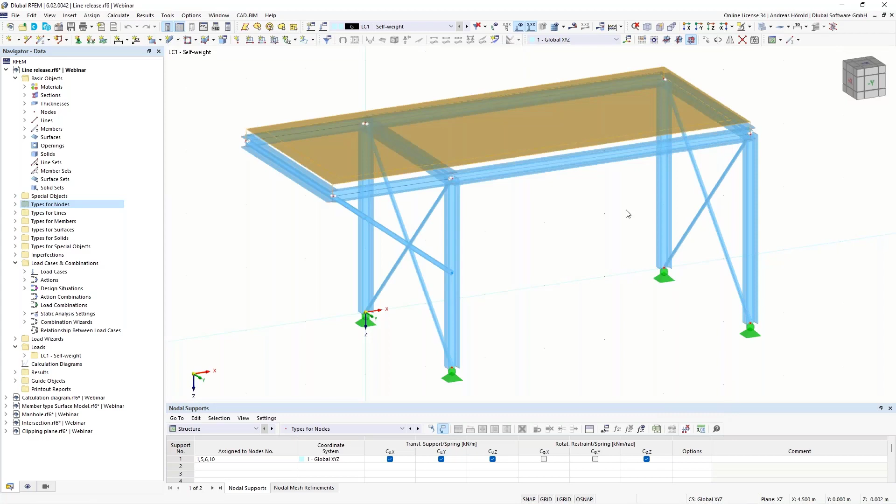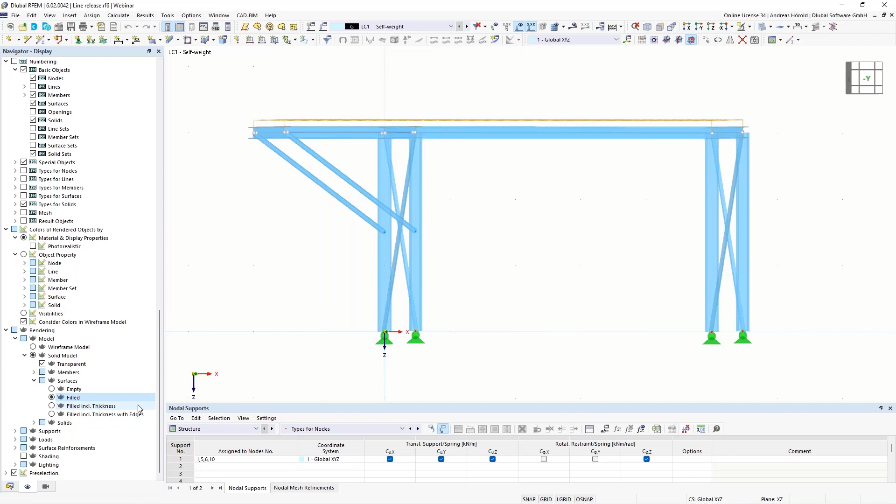This is member number 18. To see it better, I go to the navigator display, then solid model, surface is now filled, and this is filled including thickness. I would like to display it without the thickness.

So the target is that when I assign a load in that field here, this area of the slab can take off. This isn't the case at the moment.

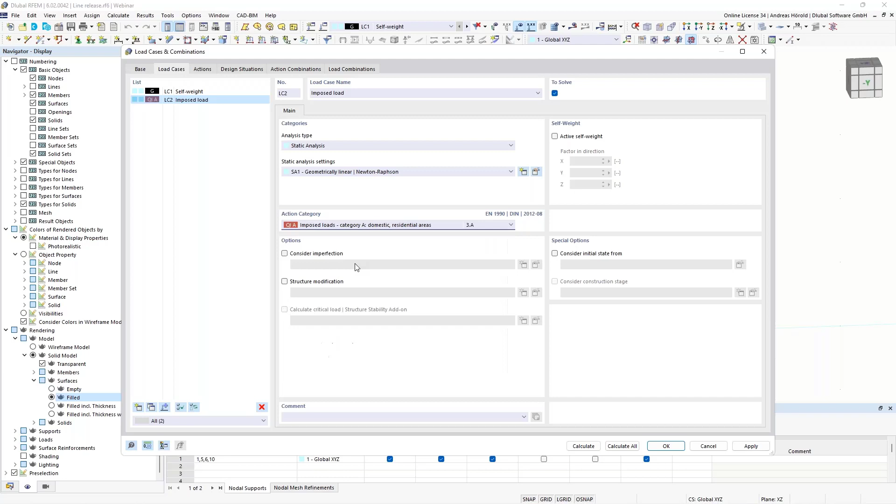Let's try that. I create a new load case imposed loads, with the action category imposed loads. Since it is a full slab here over two fields, I have to define a rectangular load, left above, insert loads, and then free rectangular loads - that's the feature I use.

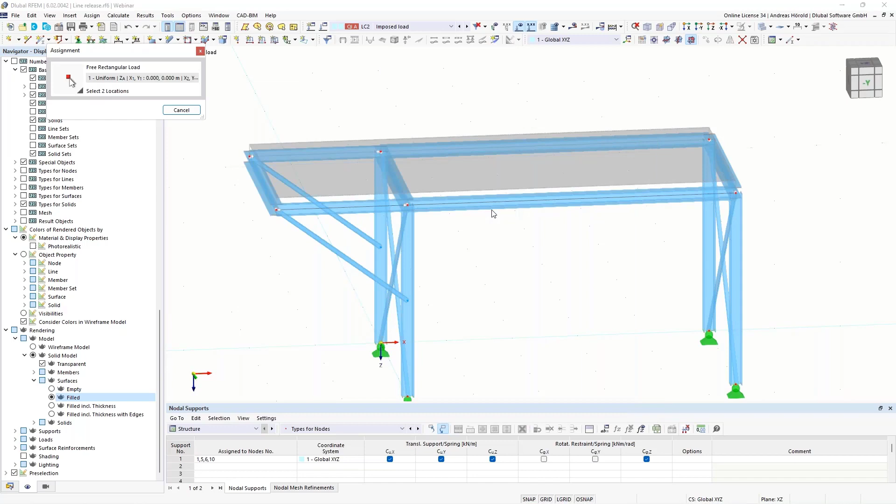So I select the slab. Then a quite high load, 20 kilonewton per square meter, and I define the edges. Okay, that's all.

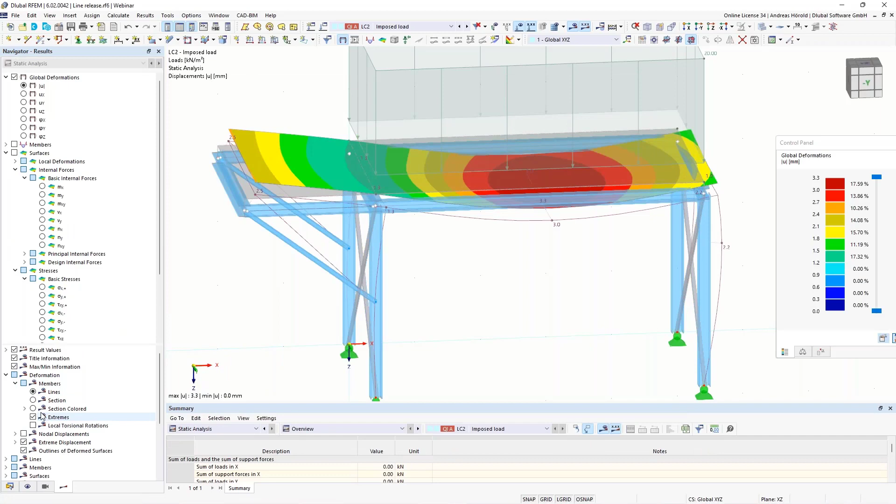So, and I calculate the load case. And you will see that the concrete slab can't take off. I displayed the sections colored, so you can see that the slab doesn't take off here in this area.

How to do that? With a line release. So, insert, special objects, and you can find the nodal releases, line releases, and surface releases here. They act the same way, and I use it in this example.

I use in this example the line releases, since they work simultaneously or similarly. I select the lines, all the lines into place, and I release surface number 1. This one - it's only one surface.

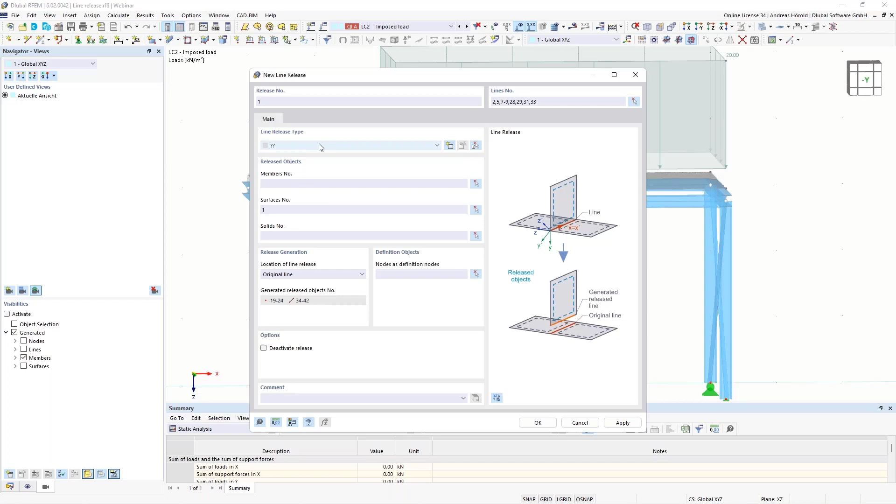And I have to define the line release type. In the first step, I release the Z-direction, and I use this nonlinearity: fixed if positive V-Z. That means if the load is in the plus Z direction, it is fixed, but it can take off if the load is in the minus Z direction.

Okay, let's try that. We calculate the load case again.

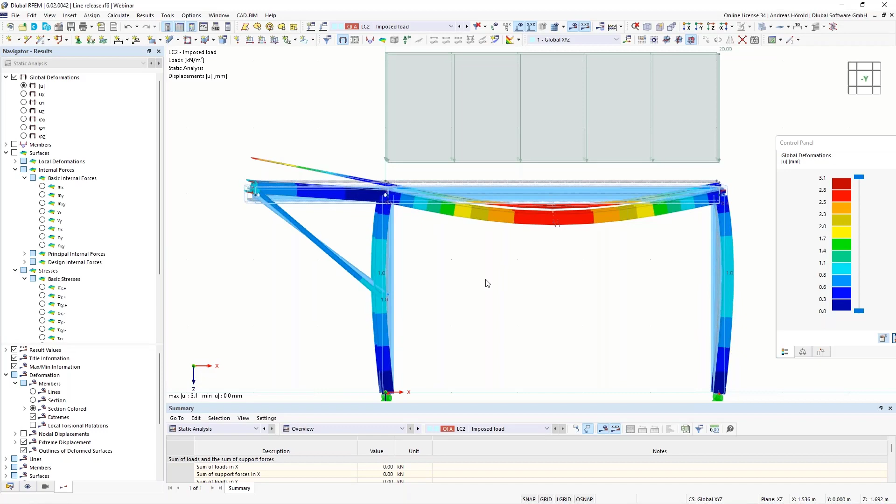So now you can see that the concrete slab takes off. But in that area, the beams act as composite beams because of the eccentricity of the concrete slab. At the moment, we have a deformation of 3.1 millimeters.

And when I release the slab in direction X and Y, then we will get a higher deformation. Then the concrete slab lies loosely at the top of the steel structure.

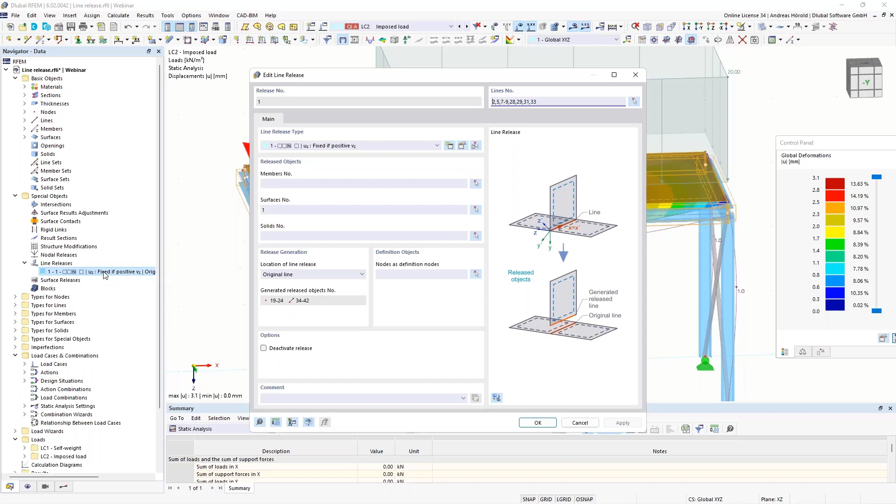So in the navigator data, under special objects, you find the line releases, and you can double click on it, or you can search for the types for special objects, and double click on the line release type, and then the same dialog opens.

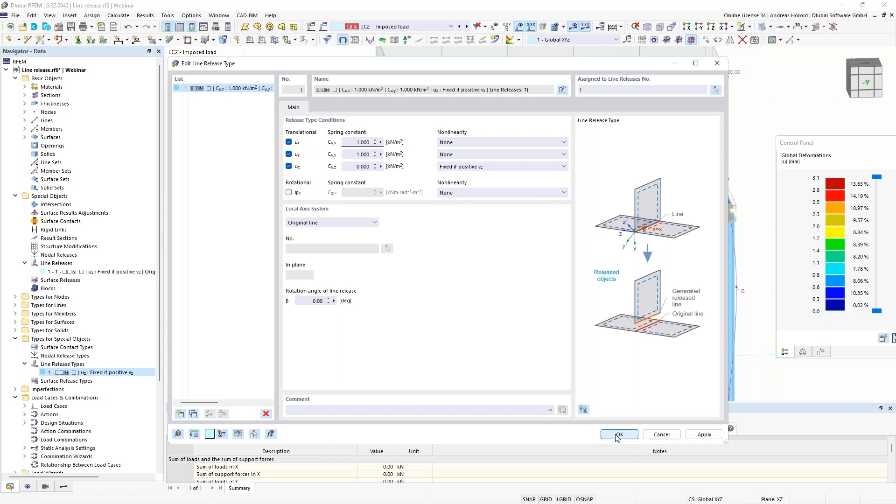Okay, then I release the concrete slab in Y and X direction, but I have to enter a small spring so that the slab can't be moved, otherwise it would be unstable when it would be 0.

Okay, we had a deformation of 3.1 millimeters. Now they aren't composite beams anymore, and that's why we get a higher deformation of 5 millimeters.

Okay, then we turn back to the PowerPoint slide. Next feature, result difference to initial state. That is useful.

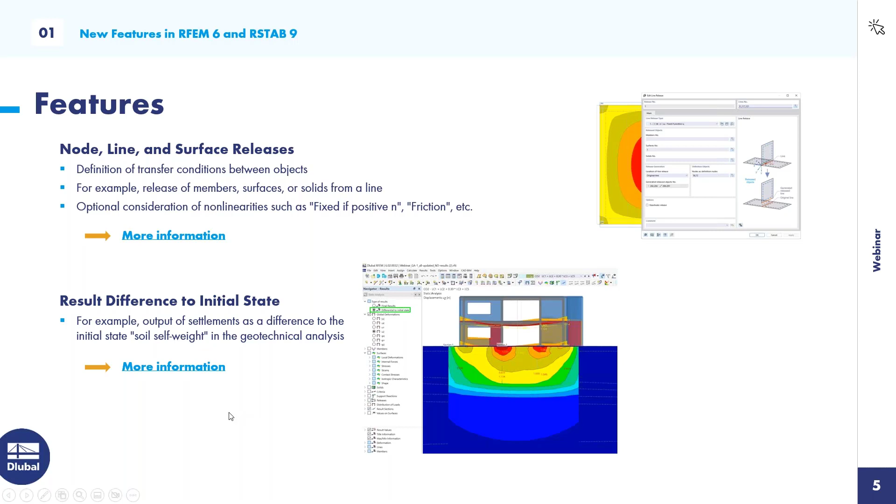Also this feature is useful, for example, if you would like to consider the soil self weight as an initial state in the geotechnical analysis. We showed that feature in the latest webinar about geotechnical analysis. You can find it on our website.

So, next features, small, but I think good features: the zoom with window with the right mouse button, or the animation of deformations. I showed it in the program.

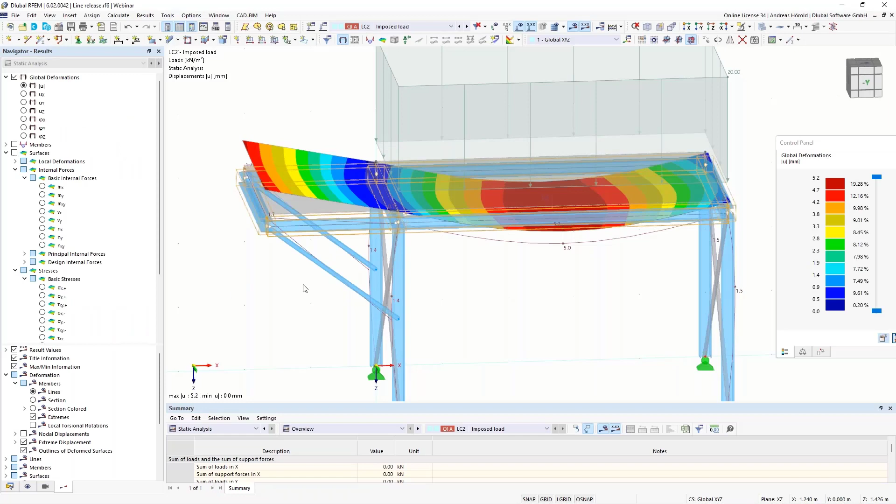So if you click with the right mouse, then you can zoom in here. I don't use this feature because I have a scroll wheel, and I can zoom in and zoom out with the mouse wheel.

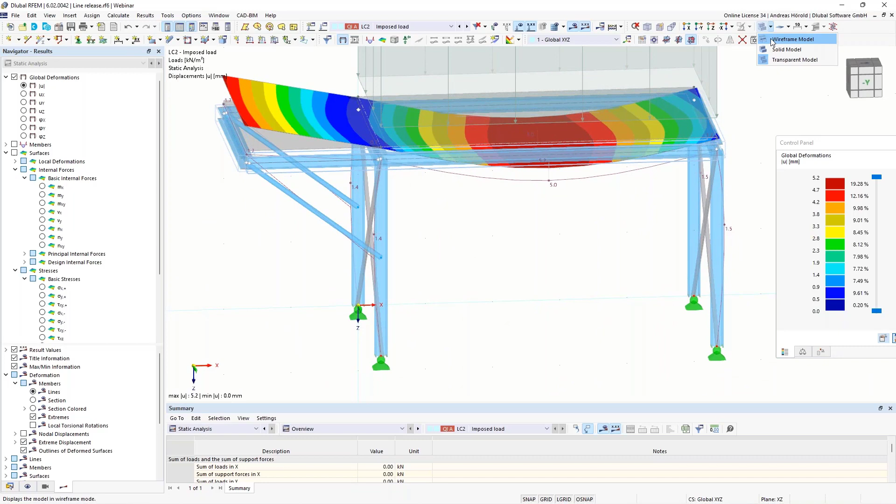I switch to the wireframe model. You can select objects by pressing, or more than one object with the control key. I hope you see the plus on the cursor. And with the shift key, you see a minus. I hope you can see it. And you can exclude it from the selection.

So double click on an object and you can edit the object, or right click to open the context menu. And if you select anything and press the control key, then you can copy those columns here, and without pressing the control key, you can move them via drag and drop.

Okay, that should be all for the mouse functions. Here under the load cases, you can animate the deformations, also with colored sections.

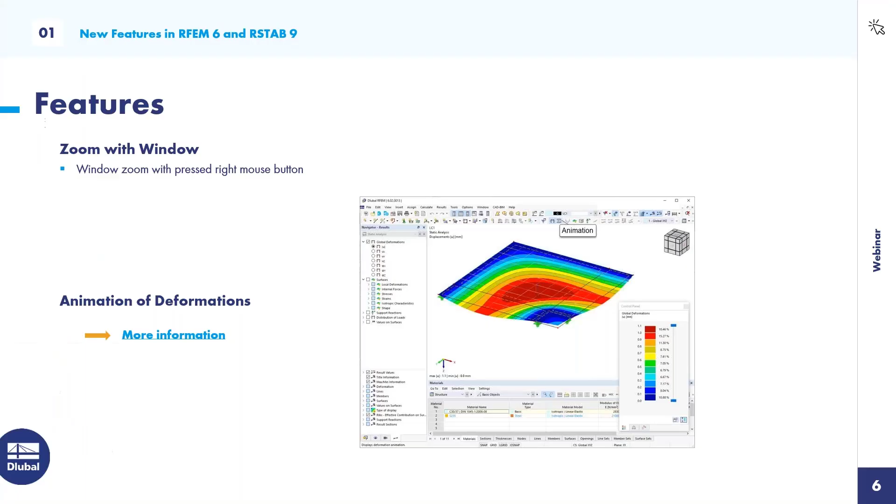Then we turn back to the PowerPoint slides. Next feature, save as version.

You can save different model states within a model. You can define an automatic save, and you can adjust the cycle. I showed it also in the program.

File, save as version. And when you open the base data, also left above, then you can find the register history, and you can find that saved version. I've already got some saved versions because of the German webinar. You can add comments, for example, a completed steel structure or completed model without loads, etc.

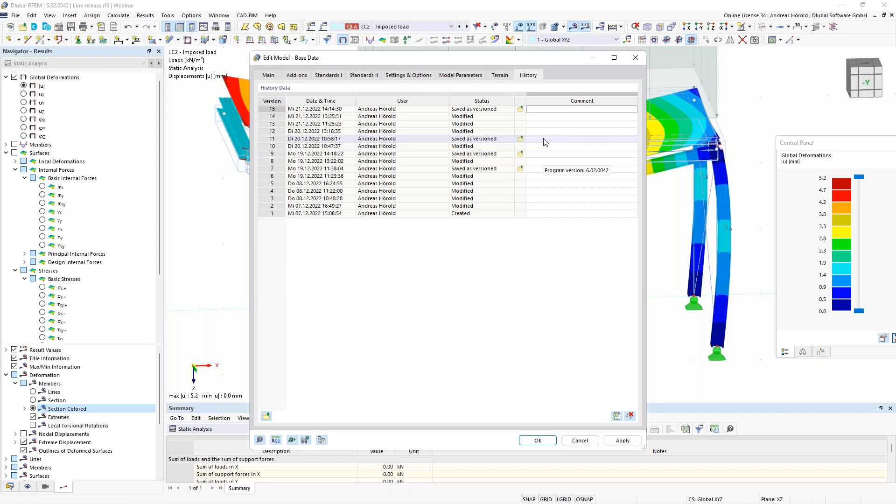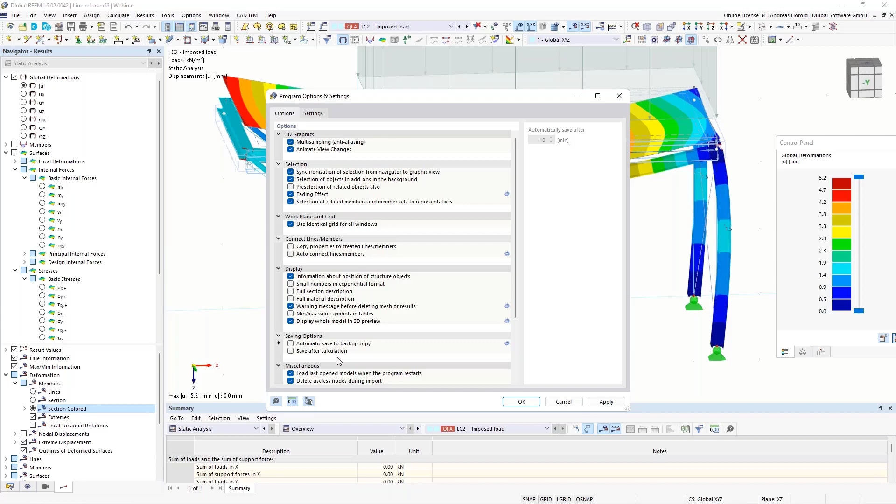Okay, and under options, program options, you can find the automatic save function, and you can adjust the cycle. It's also possible to save after every calculation.

Okay, then next features: displaying result values on ISO lines, for example for deformations, internal forces, stresses, and so on. I can show that also in the program.

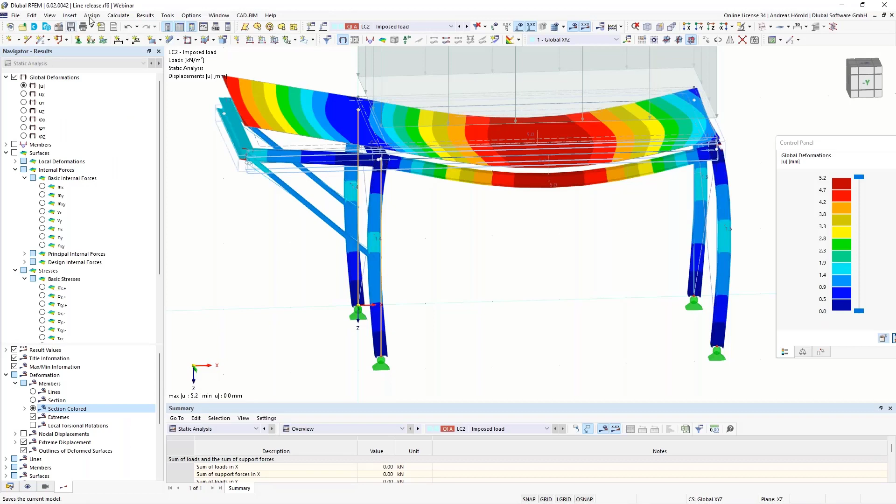We change the view, set direction.

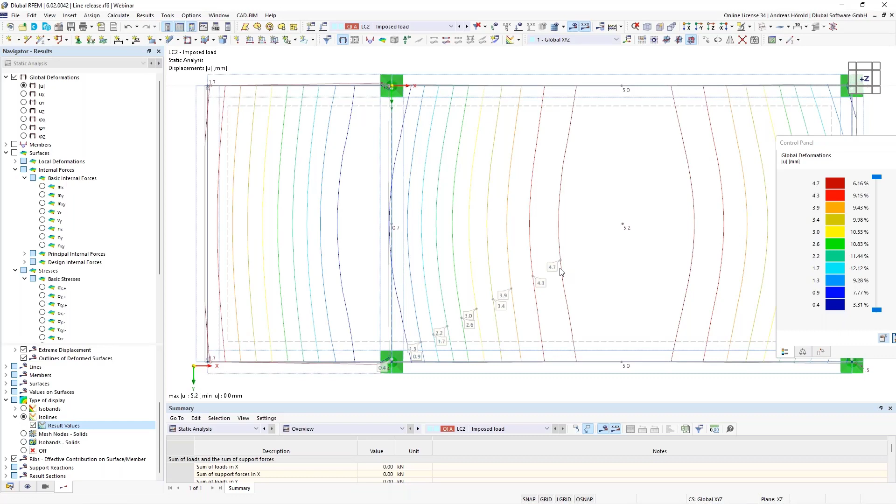And when I scroll down to the ISO lines and the result values, then you can see the ISO lines and the result values. It can be quite a good feature when you document pictures in the printout report. The same is valid for internal forces and so on.

Okay, also another feature, I change to the isometric view, is the perspective camera. It was wished by several users, and we implemented that. It was already there in RFEM 5.

Okay, then next feature is the 3D mouse support. You can operate with your free hand. I don't have a 3D mouse, that's why I can't show that, but I would like to mention that feature.

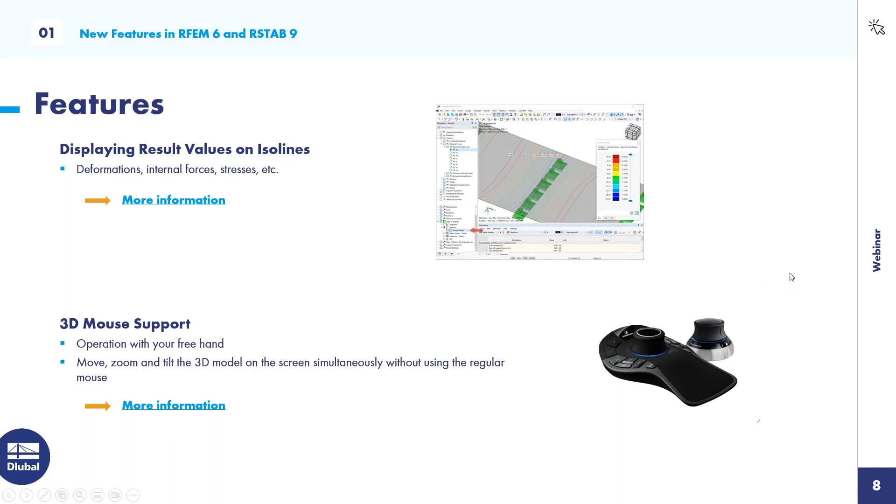And anytime you can find more information when you download the PowerPoint slide and then click on the link. At the end of the webinar, I'll show you where you can find the slides.

Then creation of calculation diagrams. You can represent relationships between different results, for example stress strains, internal forces, deformation, etc. I would like to show that with another model.

A simple column fixed at the bottom, and on the left side in the navigator data, where are the calculation diagrams. I already created two diagrams. For example, for the static analysis, the increment, maximum deformation, and you can see such a diagram. It's non-linear because I use the large deformation method.

So that's for the static analysis, and this diagram is for the stability analysis. I create another diagram where you can see the options on the horizontal axis. There are different types: members, global deformations, member strains, etc. I use nodes, global deformation, UX,

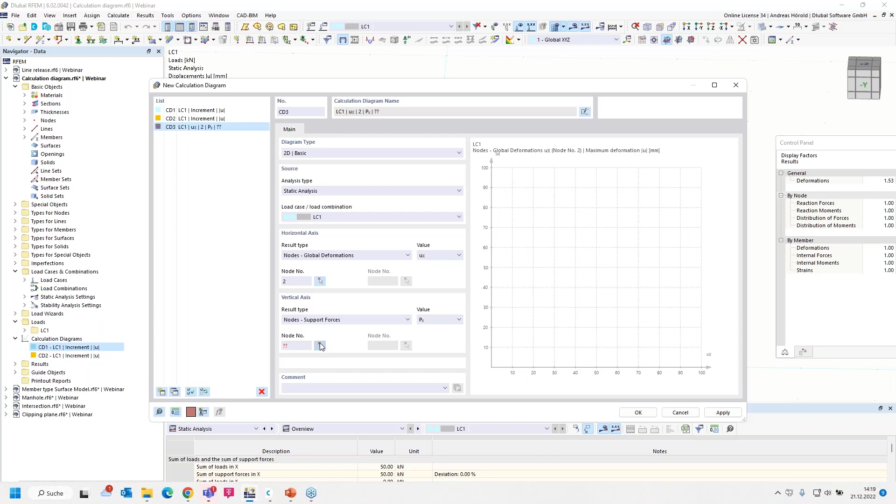and the node at the top. And I use here nodes support forces, PX, and the node at the bottom. And then you get such a diagram.

Okay, that was wished by a lot of users. Then turn back to the PowerPoint slides. Changing node types, yeah, you can adjust the type and location. I would like to show that also in the first model.

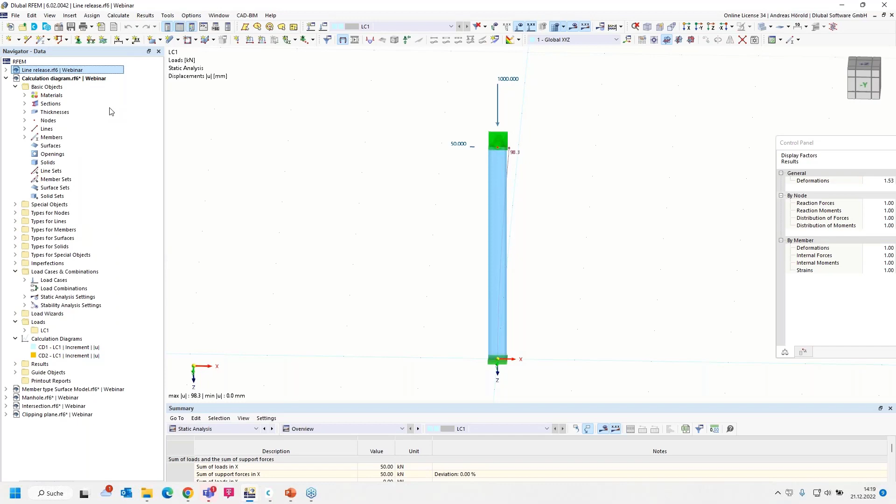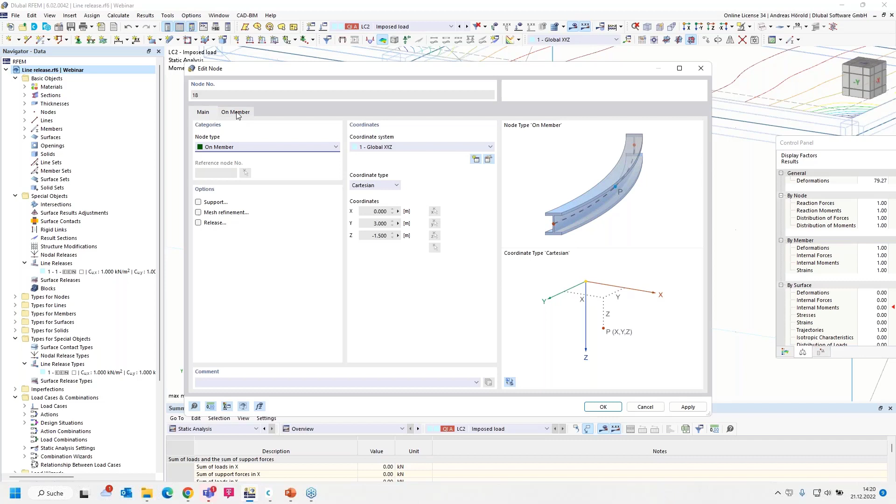Now, for example, for this node, when I double click on it, you can change the node type, for example, from on-member to standard. You can add supports, mesh refinement, releases, etc. And you can change the distance between the two nodes. For example, I can change that from 50 to 20% and apply that. Okay, and the node has been moved.

I undo that. Okay, then back to the PowerPoint slide. Next features.

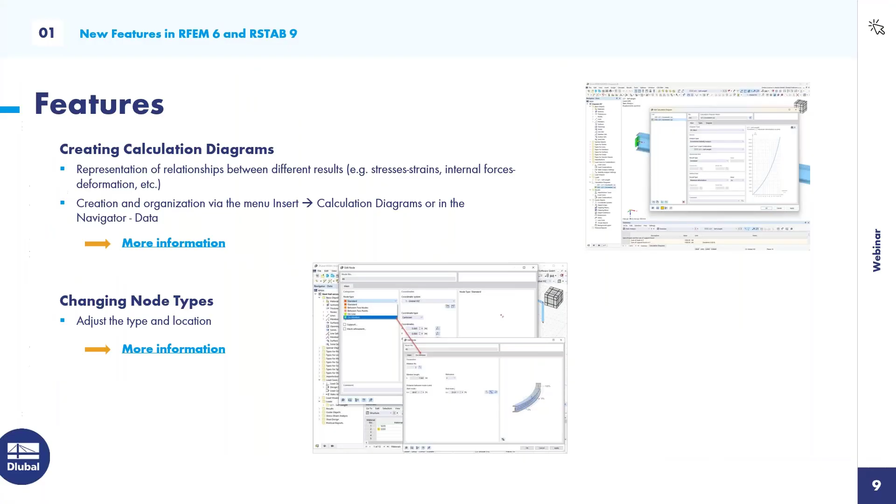A quite powerful feature, the member type surface model. You can simulate openings in webs. You can consider the real stress distribution. And you can use the member results in the add-on. You can use it for castellated beams, perforated beams, beams with rectangular openings, Vierendeel trusses, etc.

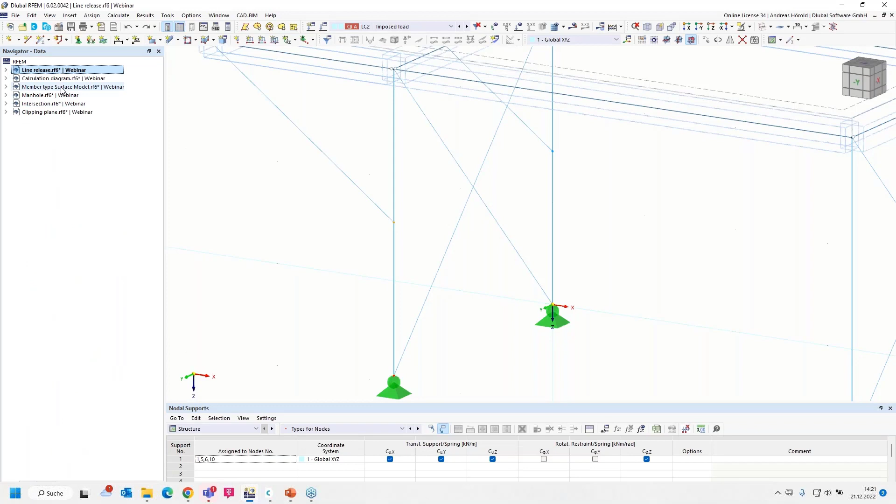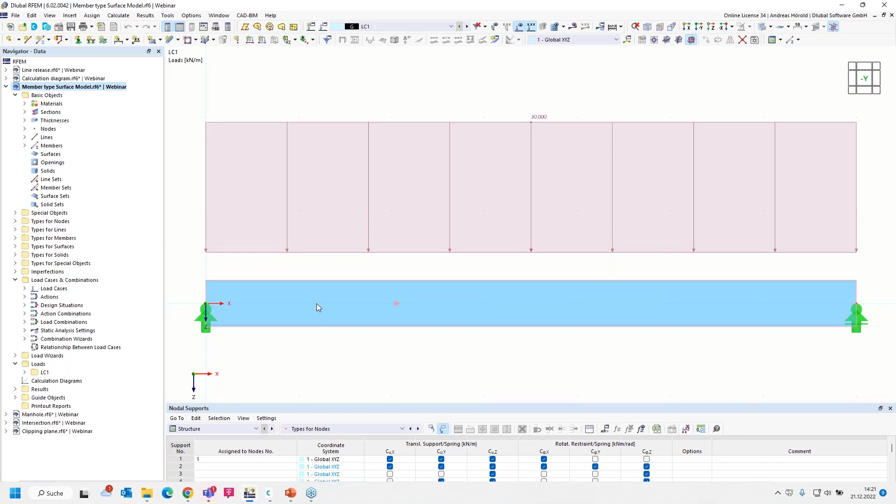I would like to show that in another example. I've already prepared a single span beam. The cross section is an IPE 500, and I would like to add holes, or openings, here. So that's why I double click on the member and change the member type to surface model.

And I select here member openings. A dialog was added, member openings, and I define the openings. There are three reduction types: rectangle opening, which you can see here in the preview, the circle opening, and the hexagonal opening. Such a typical castellated beam is displayed here in the preview.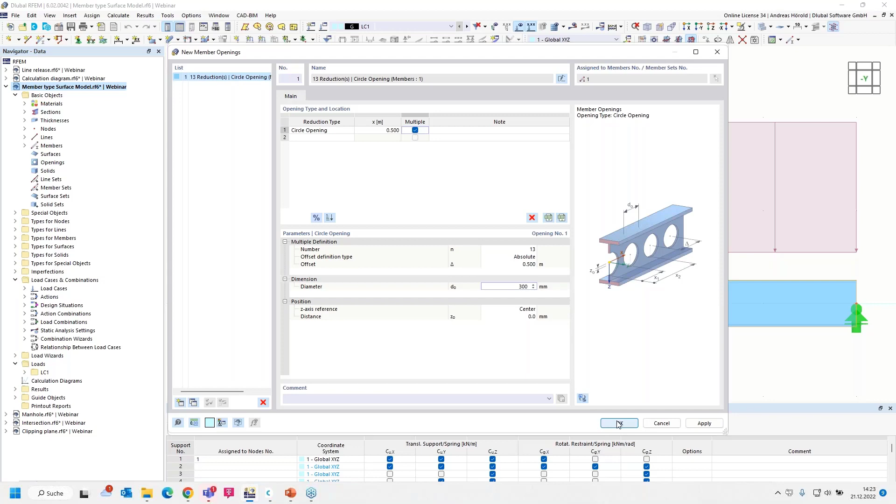I select the circle opening. I start at 0.5 meter, and I would like to add more than one opening: 13 openings, and the offset can be absolute or relative. If relative, you have to enter a percentage here. I choose absolute, and the offset should be 0.5 meter, and the diameter 300 millimeters. Okay, I apply that, and you can see the circle openings.

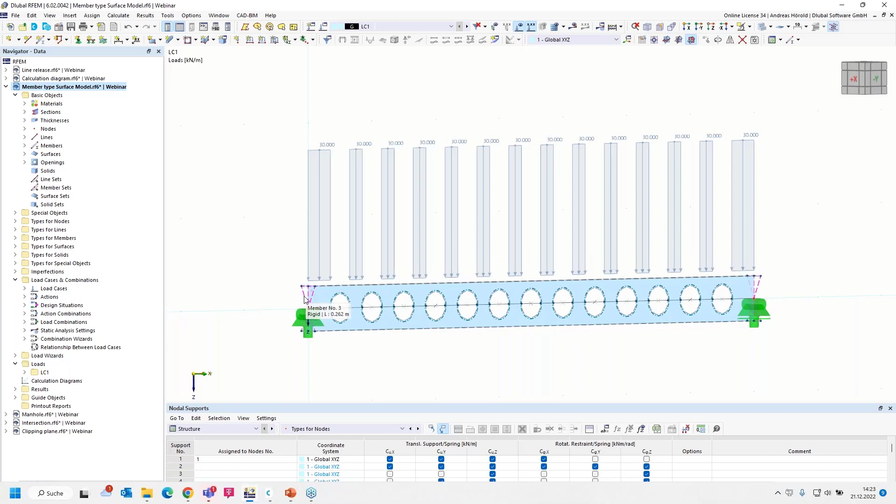Right above, there's a new button, and you can switch between displaying the surface model and the normal model. So you can see rigid members here that connect members, for example, if you want to consider such a model in your complete member model, the stiffness, for example, of such a member or something like that.

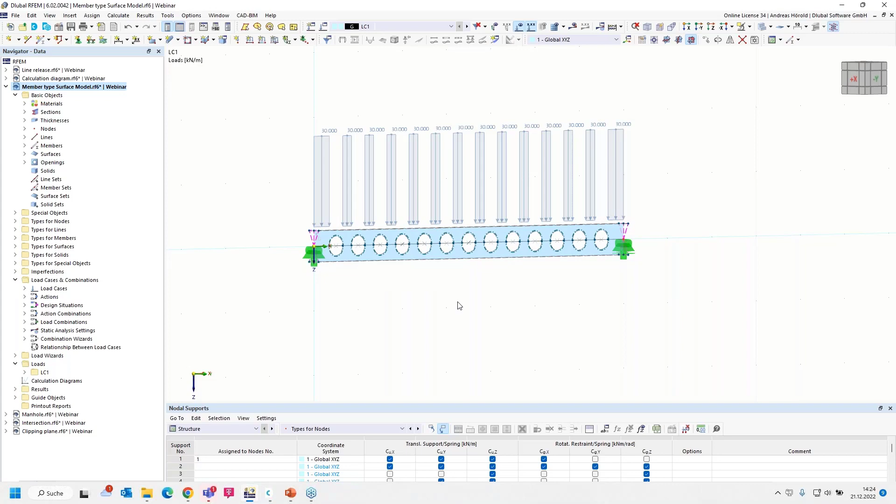So you can see that the load has gaps. I entered the load in the middle of the beam, and I would like to correct that there are gaps. In the navigator data, where are the loads? You can see the new line load and the member load, and both are still connected. If I change the member load, the line load will be changed.

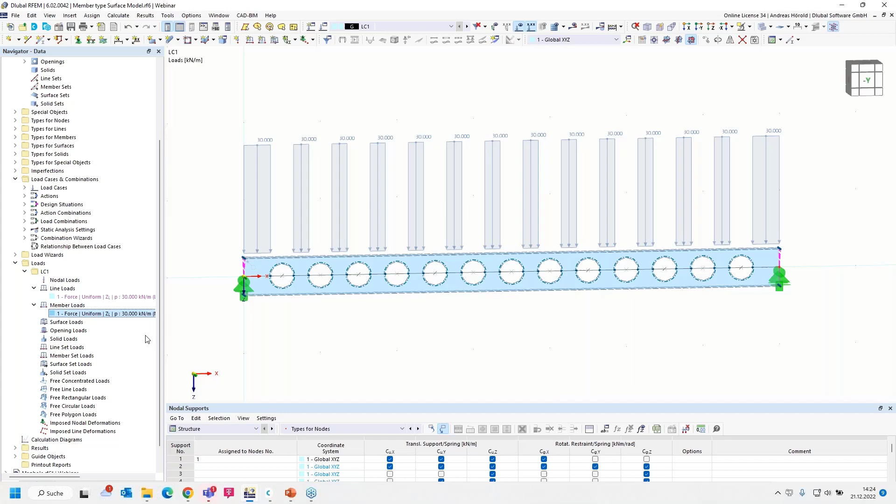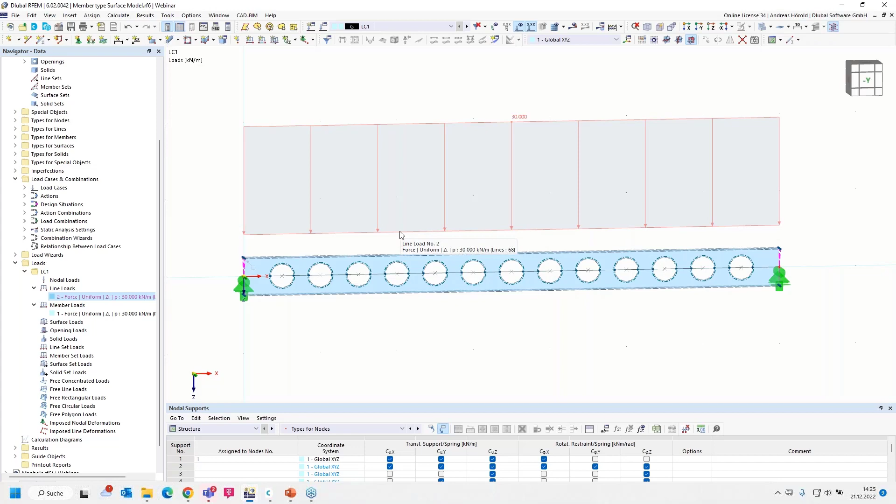So I double click on it, then I select eccentricity, and under force eccentricity, I select the top of the member for the load. Okay, and now you can see the member load and the line load, and the line load acts on line number 68. You can see that in the preview, and this line is line number 68.

Okay, that's correct now. So then we can calculate, or I have also defined a design situation, with only one load case, but I use that design situation.

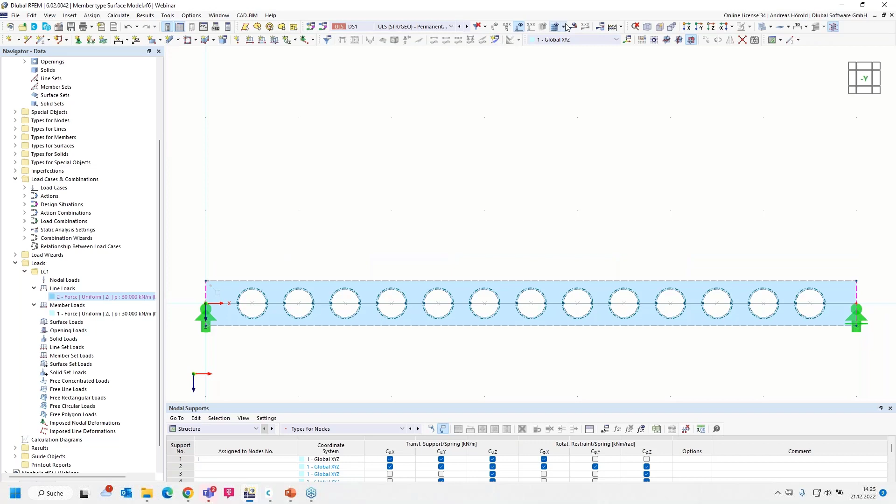So, and now you can see, for example, the surface stresses, basic stresses, principal stresses, and so on.

And if you want to do a real design, then you have to go to the base data and activate the add-on stress strain analysis. I change the settings of the stress strain analysis, and I select only the surfaces for the design.

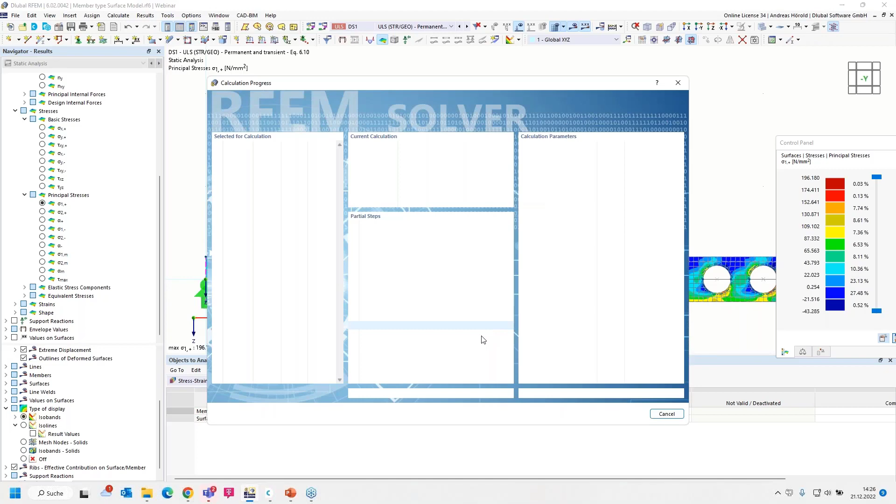And now you can see also a stress ratio, the different stresses, sigma eq v max von Mises, for example. Yeah, that's a normal stress analysis.

If you want to do a stability design, you have to activate the add-on structure stability, and with the eigenvalues, you have to define imperfections and assign that to the structure and do a stability analysis. But for such a stress analysis, we would be at the end.

Okay, that should be all to that feature.

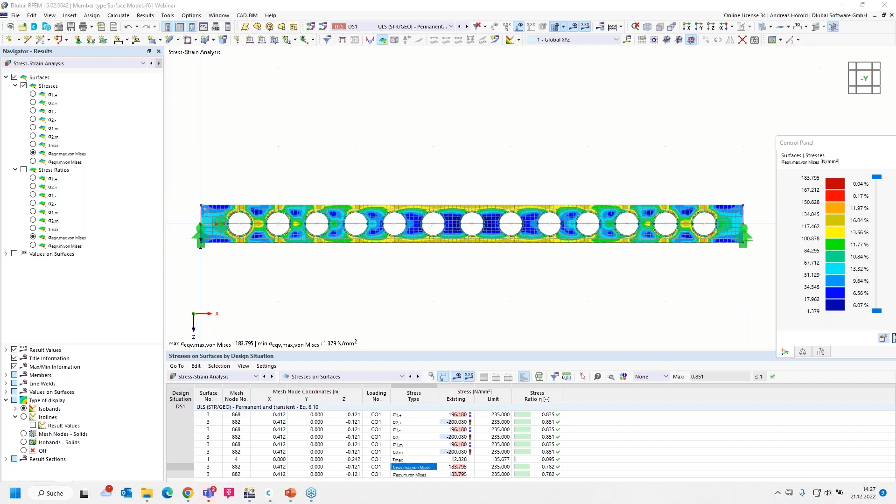Next feature is plastic hinges according to FEMA 356. And it's possible to create pushover curves with that feature. In the future, we will implement the new add-on pushover analysis. I will mention that in the prospects.

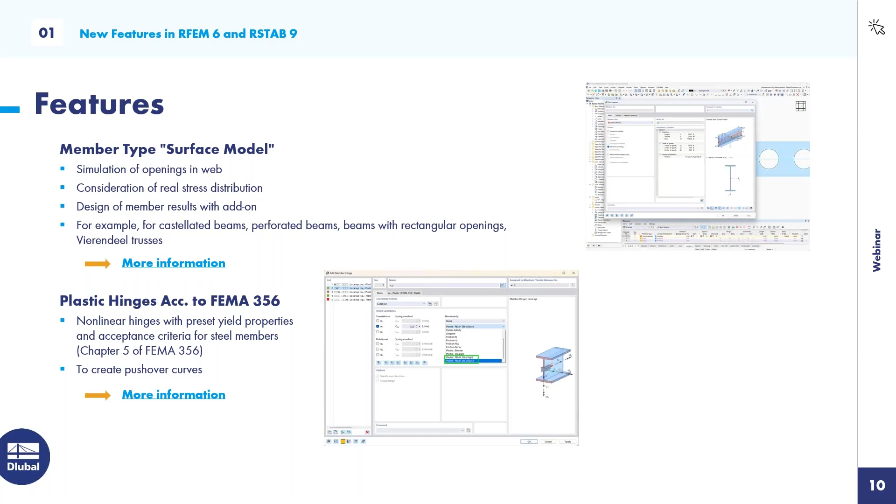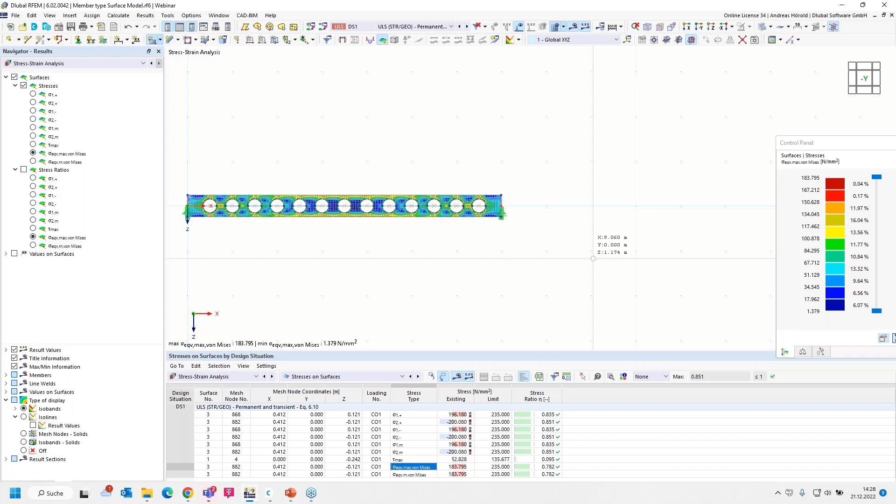Okay, next feature, dividing surfaces with intersection lines. That's quickly to show. I create this simple rectangular slab. Doesn't matter what it for materials. Then I draw a line.

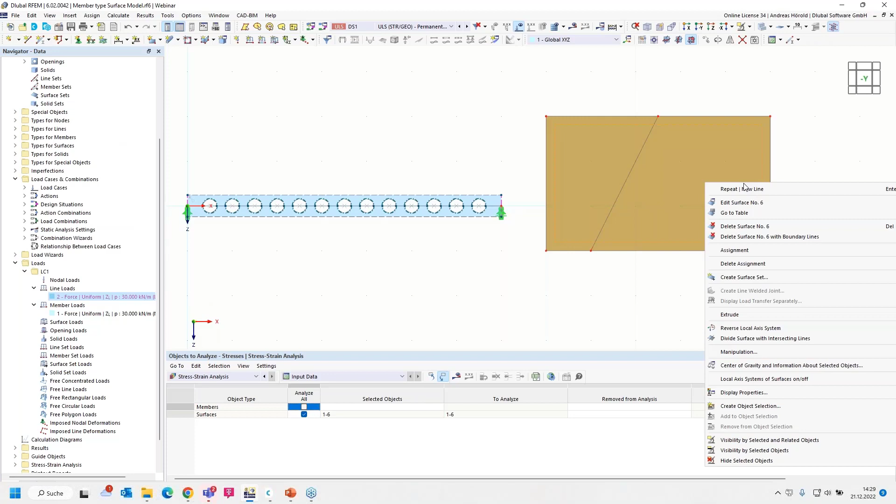So it's still one surface, but when I right click and then select divide surfaces with intersection lines, now I have divided it, and now those are two surfaces.

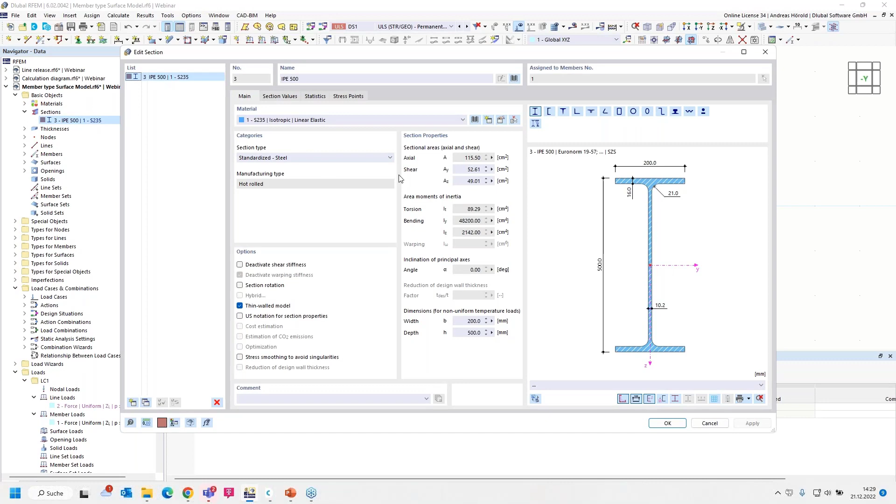Okay, then next feature, accessing the manuals chapters with the F1 key. It's also a powerful feature when you need help. I go back to the program. For example, that's the cross section, and you can go to any chapter here or any dialogue.

And when you press at the bottom the help button, or you press the F1 key, then it moves to the stress points, to the chapter that is connected with the dialogue. That's all to this feature.

Next feature, intersection of curved surfaces and solids. A new surface type is trimmed for the intersection of curved surfaces, for example, for pipe penetrations, twisted openings, and so on. And for the solids, there are two new types, hole and intersection. You can use it, for example, for complicated construction pit shapes, perforated solid shapes, and so on. I would like to show those two features in the program.

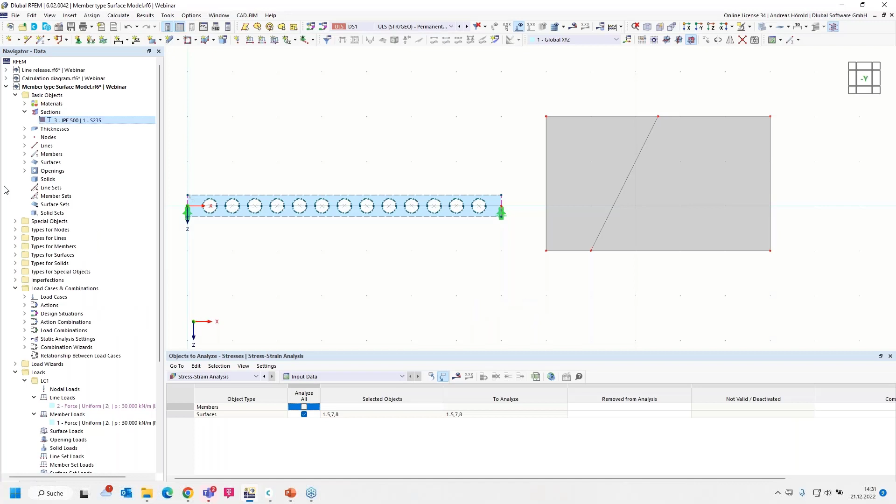I start with the second feature, with the solids. So next model, manhole is the name. I created 4 different solids. I can open them in the navigator data. 4 cylinders. I use different materials, the concrete for the manhole that I would like to create.

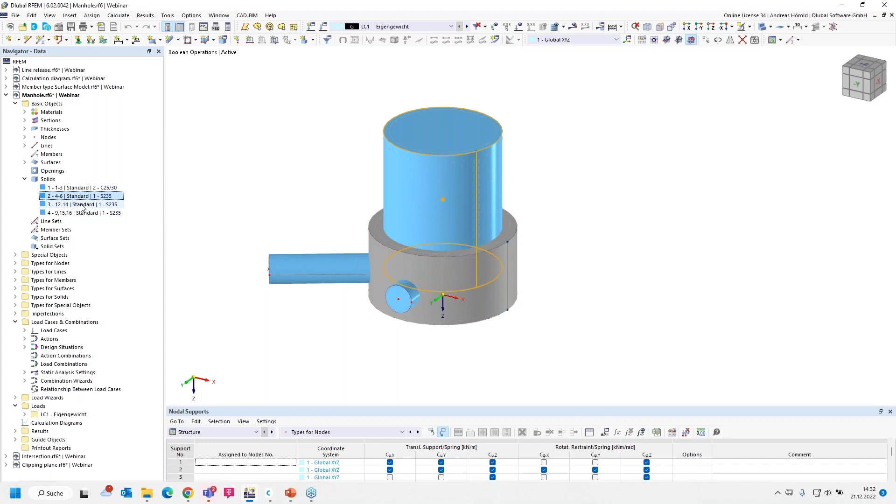And those solids are from steel. And if I want to use Boolean operations and subtract those solids from this solid, I have to select the 3 solids, then right-click and edit the solids. And I select the solid type hole.

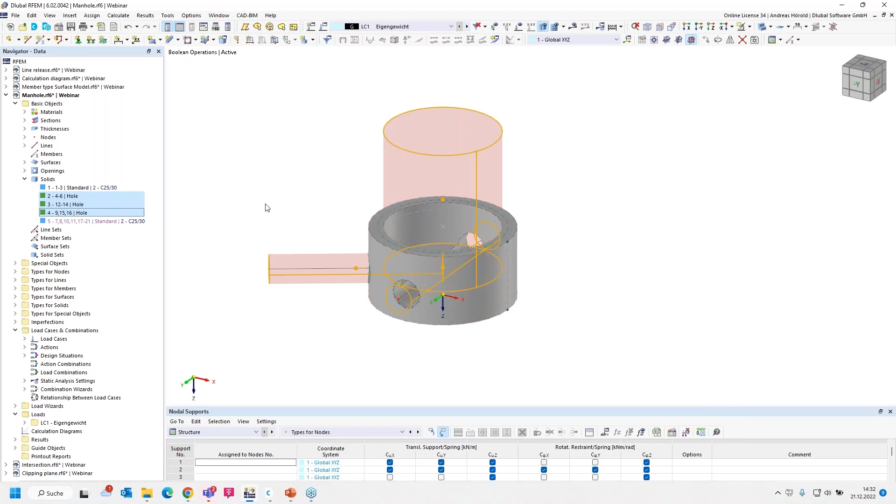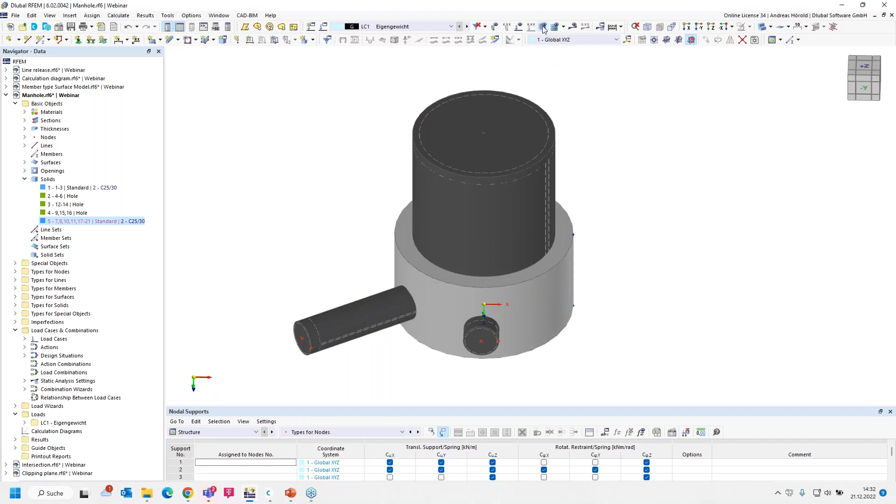And now the 3 solids are subtracted from the first solid, and that's the manhole with openings for pipes, etc. Only a simple example to show that. And with that button above, you can switch between different display options.

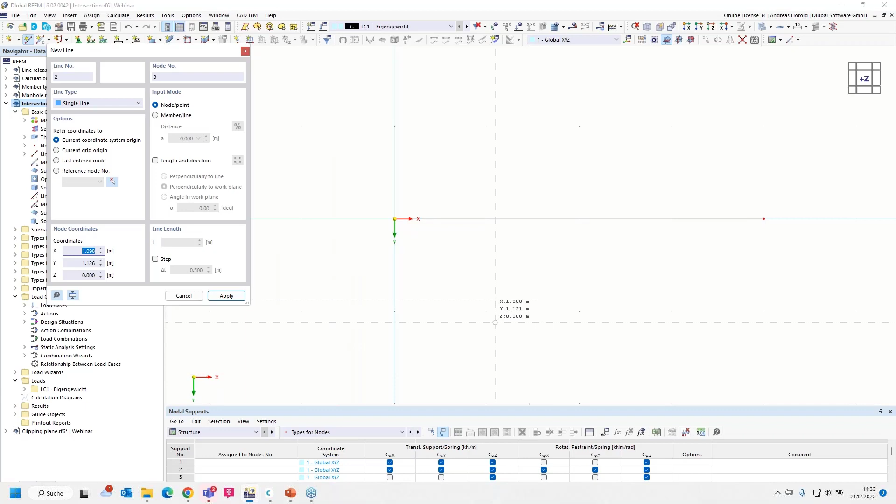Okay, next model for the intersections. It's an empty model. I draw 2 lines, so okay, such a crossing. And I enter pipes. The thickness of the pipe actually doesn't matter, but I change it to 5 millimeters.

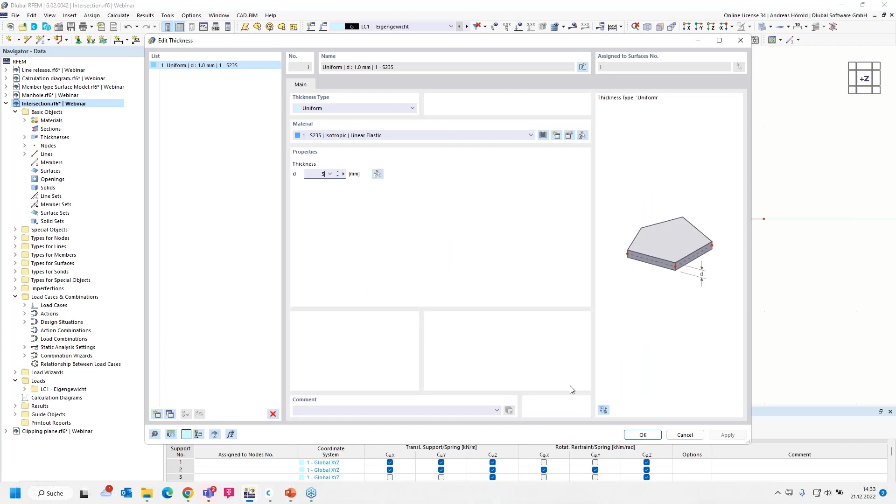And select under the dialog pipe the radius, or define the radius 20 centimeters. The first pipe is created. And with enter, I go back to the dialog and I define a radius of 15 centimeters.

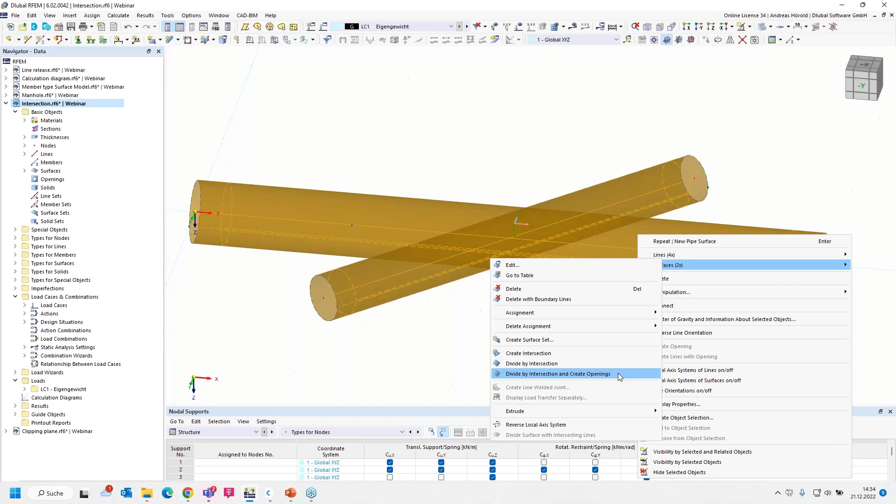So there are 2 pipes, but they are not connected. When I select them and with a right mouse click, I open the dialog, and under the surfaces, you can find the options: create intersection, divide by intersection, and create openings. I select the middle feature, and you can see now there are intersections with different components. On the left side in the navigator data under surfaces, you can find the different components, and they are trimmed.

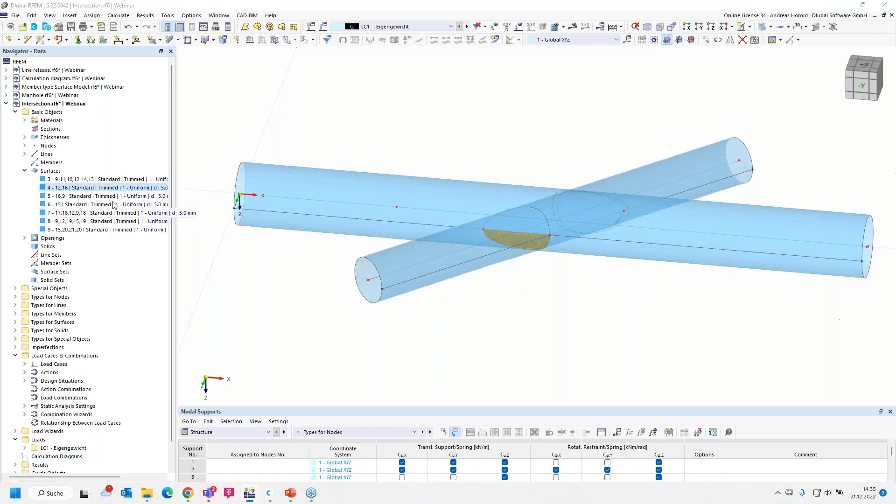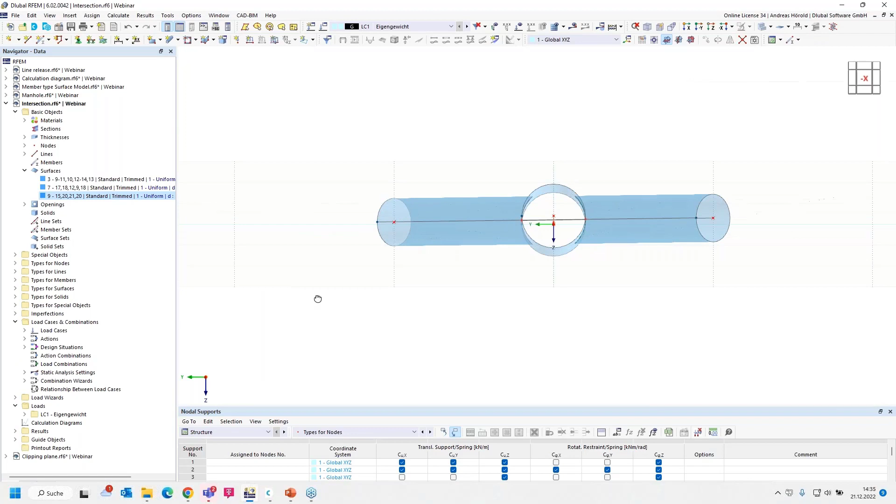I click through the single components, and I select those components that we don't need. With the Control key, I can select more than one surface. This one, not this one, but this one, and not this one. And I delete them. Now we can take a look through the pipes, and that's the intersection line here, a NURBS line. Yeah, and the pipes are now connected.

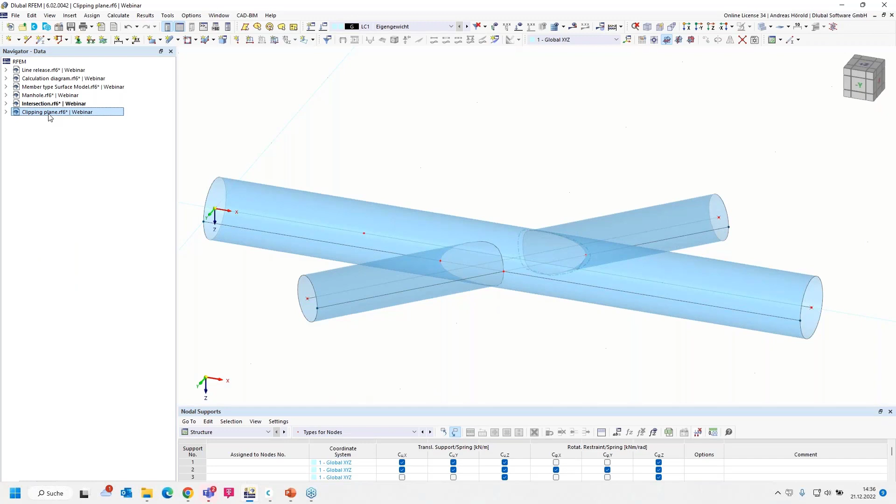Okay, then we turn back to the PowerPoint slides. Yeah, moving the clipping plane is also a good feature to evaluate your results. I go back in the program. So yeah, it's good to show on such a solid model with results.

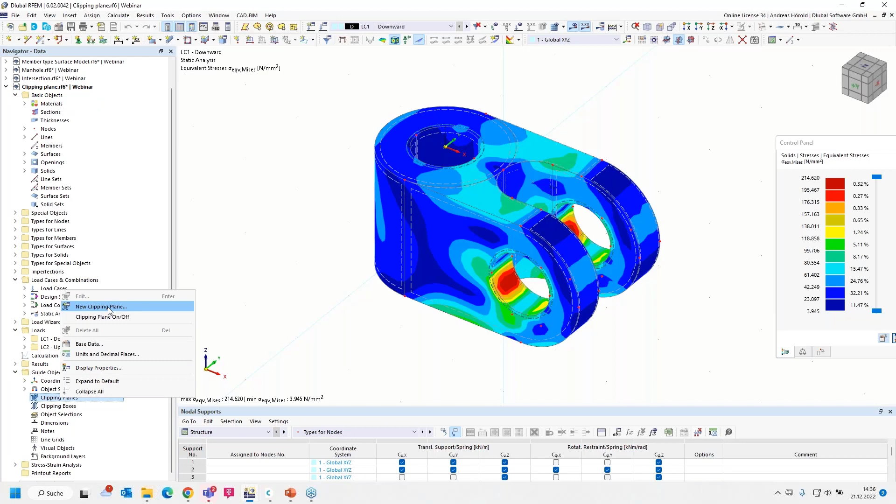And under guide objects in the navigator data, you can find the clipping planes. And by right click, I can create a new clipping plane. There are different types for the clipping planes, 3 points, and angle, and so on. I like the offset because I only have to select 1 point in the model and define the plane. XZ, for example, and I press OK and set active. And then that's the new feature.

You can move the plane with such a point here on all edges.

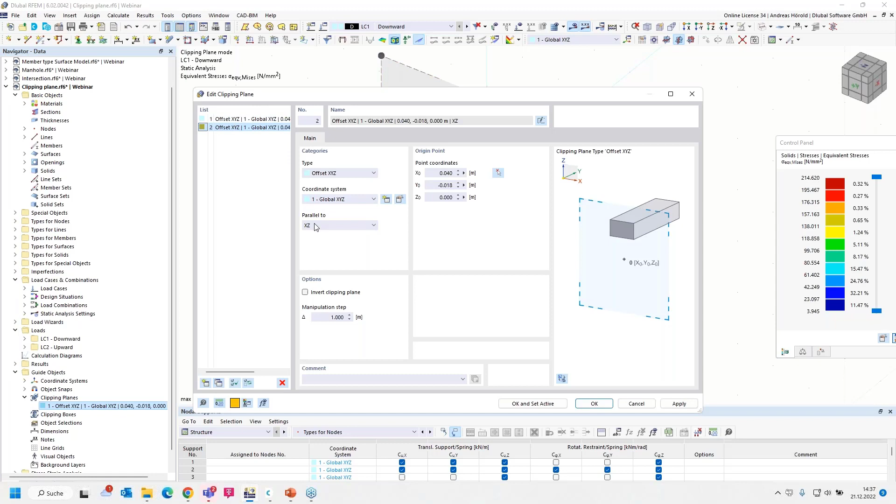You can copy that clipping plane and only change the plane, so then you've got the same feature. As I said, it's a good feature to evaluate your results.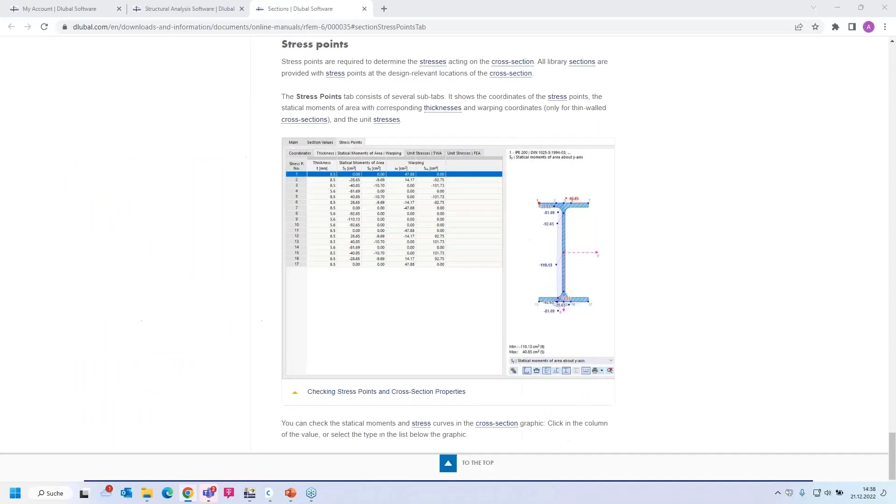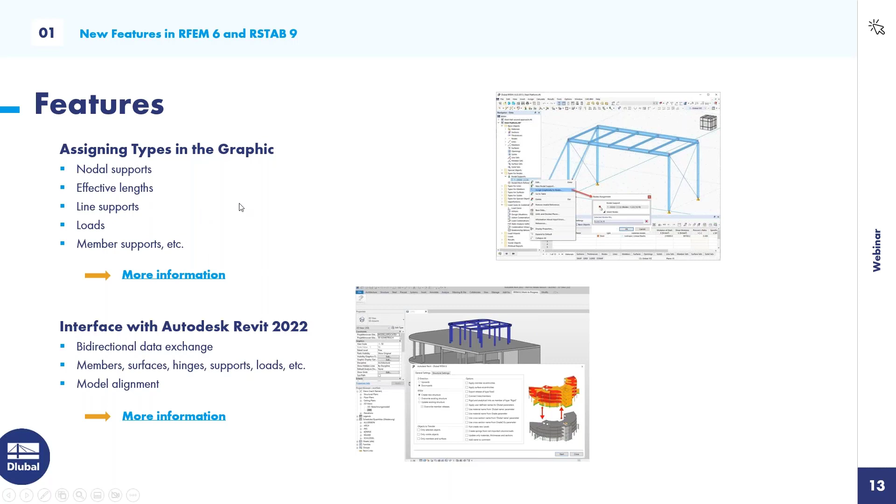Okay, then note to the PowerPoint. But I would like to show that feature, for example, with nodal supports. I go back to the program, for example, in the first model.

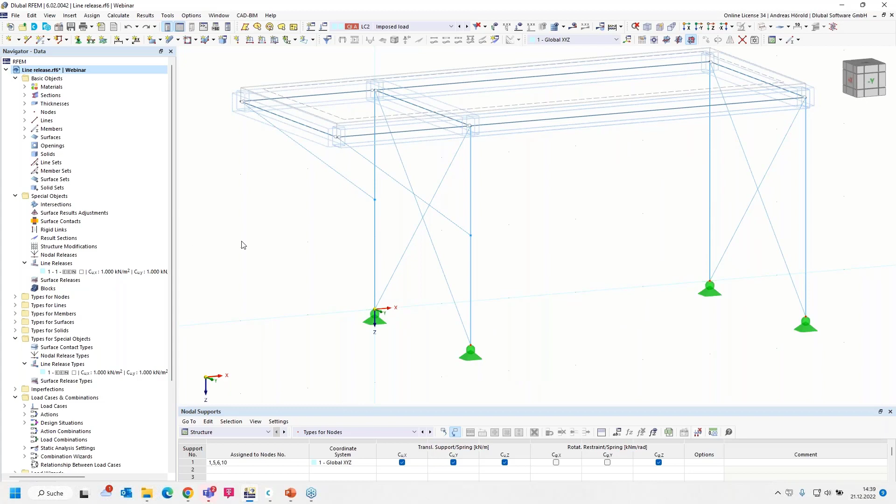For example, when you want to add such a support to different nodes, you can find the types for nodes, nodal supports, and then by right click you can select assign to nodes graphically. You can add them here quickly. Yeah, it is a good feature, I think.

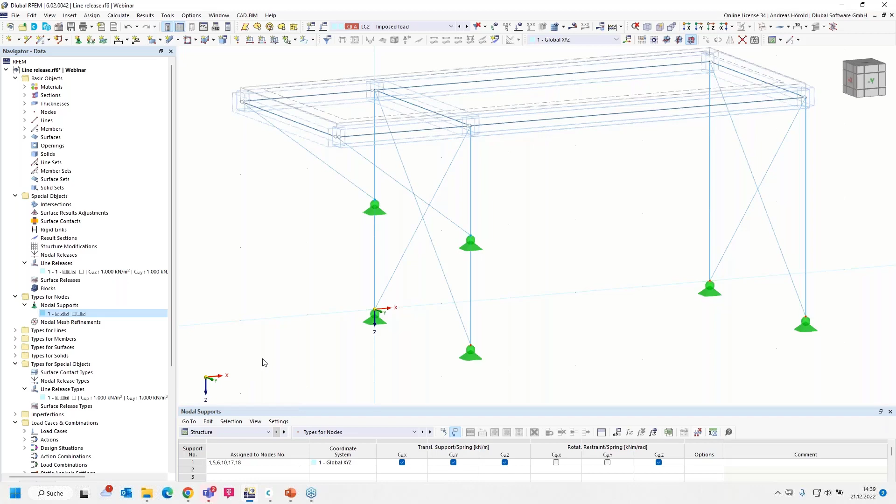Maybe better for other components such as effective lengths also.

Okay, next feature is the interface with Autodesk Revit 2022. The bidirectional data exchange is possible. You can transfer members, surfaces, hinges, supports, loads, and so on, and you can update the model in the other program.

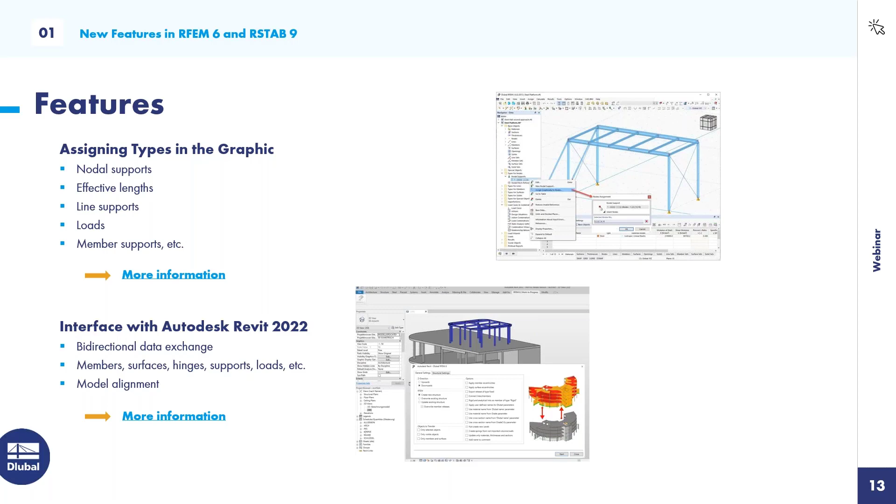Okay, that was all to the general features in RFEM 6 and RSTAB 9. Now I would like to introduce some features of the add-ons and the standalone programs, not in the programs, only in the PowerPoint, because it's not interesting for everyone.

RWIND: the freely adjustable wind permeability for surfaces has been implemented. That's, for example, for permeable scaffolding, dust curtains, mesh structures, and so on.

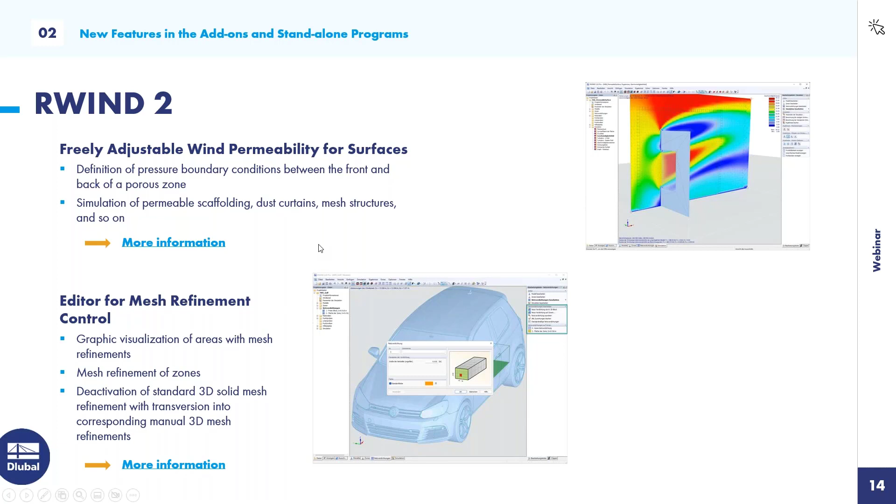Then use the editor for mesh refinement control. Other new features are the load factors for zones, the point clouds, new auxiliary objects, and so on.

In the webinar two weeks ago, we presented all those features. If you click on that link, you can watch the recording and see all the new features.

RSECTION also has interesting features. You can create elements automatically from a DXF file, or you can use DXF template lines as center lines of an element with a defined thickness.

For example, when you see that cross-section here, imagine you have center lines as in DXF. Then you import the center lines and only define a thickness of, for example, 2 millimeters, and with one click such a cross-section is created.

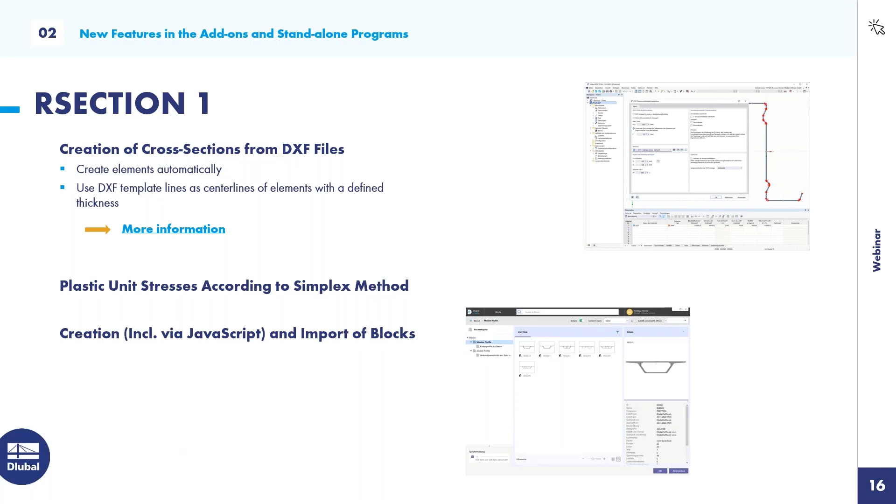Then a new feature: plastic unit stresses according to the simplex method, and the creation and import of blocks in RSECTION. The creation is also possible via JavaScript.

RSECTION and Steel Design add-on: new is the mode shape, or the graphical output of the mode shape for distortional, local, and global buckling. Also for RSECTION cross sections, it's also a feature of RSECTION for library cross sections.

New in the Steel Design add-on is the designing of cold-formed steel members according to EN 1993-1-3. It's valid for cold-formed sections from the library and for general cold-formed sections from RSECTION, but not for perforated sections.

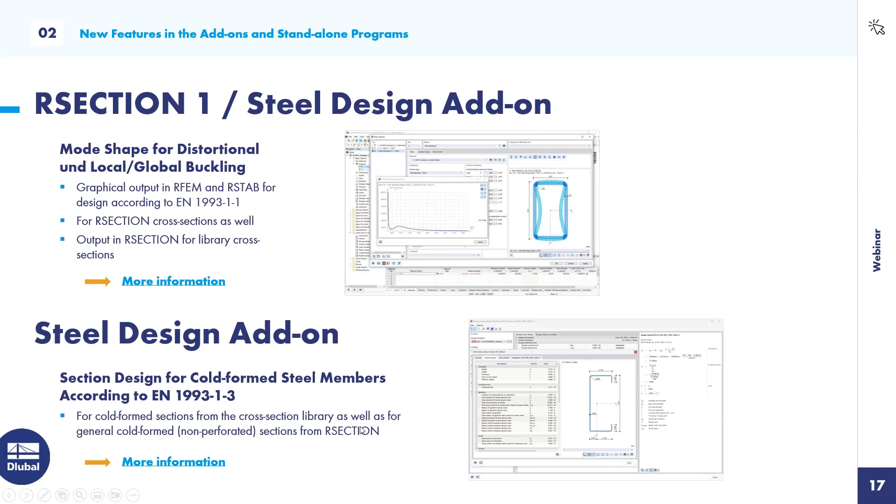Then the Concrete add-on. There are also powerful features, for example the automatic layout of surface reinforcement. You can define, for example, here automatically for the diameter.

Define, for example, minimum and maximum diameter, and the program determines the optimal diameter of the reinforcement. The same is valid for the rebar spacing.

Then another feature is the multi-editing of member reinforcement. You can define the options for the concrete design for more than one element, for example members and set members. Use also the detailed results in graphic, or the punching shear of foundation plates.

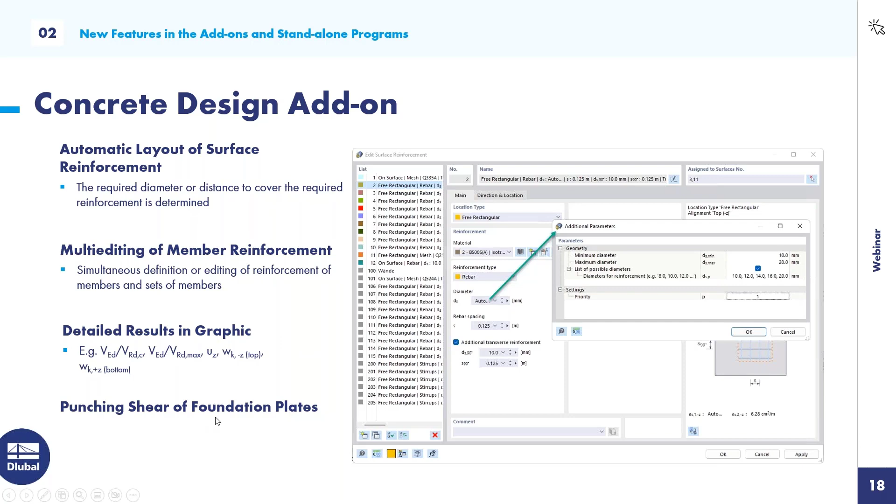Then new in the Steel add-on, or Steel Joints add-on, is the connection of rectangular hollow sections. You can see that on the right side, and they are connected via welds.

Then there are new components: end plate to plate, the general weld, and the fastener. That means you can assign a general positioning of screws.

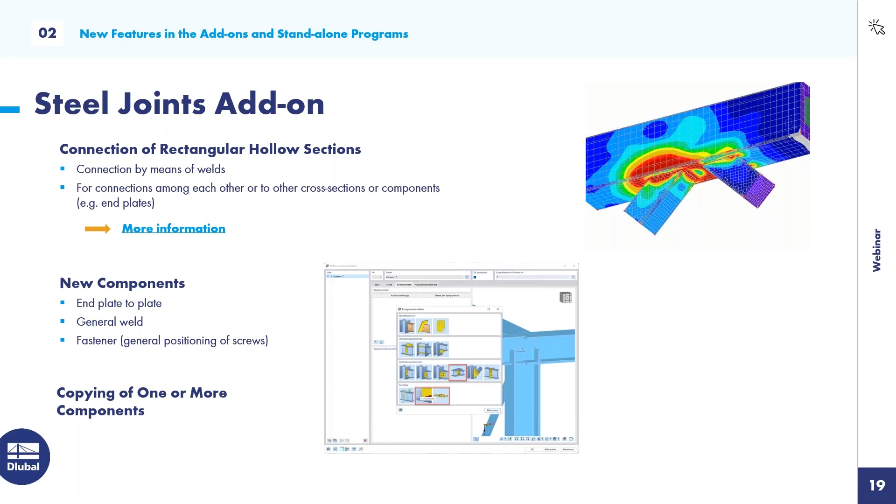Another feature is the copying of one or more components. That's a feature we already showed in the latest webinar of the Steel Joints add-on some months ago. You can find it also on our website if you are interested in the Steel Joints add-on.

Really new is the design of CLT panels in the Multi-Layer Surface add-on. You can perform an ultimate limit state design, serviceability limit state design, and fire protection design.

You can use it for floor slabs, deep beams, and so on. You can also treat singularities, and a fastener design is possible as well.

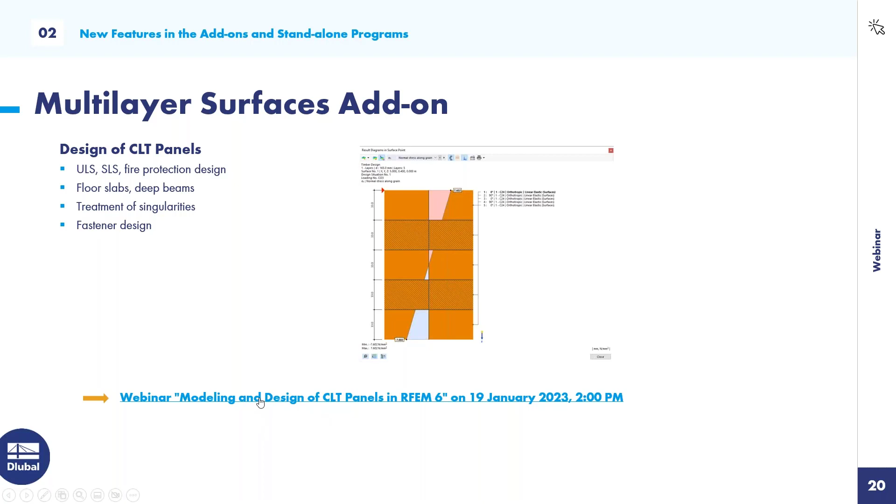We would like to show all those features in the webinar Modeling and Design of CLT Panels in RFEM 6 on the 19th of January next year. Bastian Kuhn will present it, and you can already register when you click on that button here.

And the last feature of the add-ons and standalone programs is the improved segmentation for deformation analysis. It's valid for, or you can use it in the timber design and concrete design add-on for the automatic segmentation for deformation limits, cantilevers and single span beams. Okay, that should be all to the features in the add-ons and standalone programs.

Now we turn to the last point for today, the planned features. We will update the interface with Autodesk Revit to the version 2023. Then we will implement the interface with Tekla Structures. Then it's also planned to implement the load transfer. You can transfer the load from another model, and both are digitally linked. That means you can transfer the support reactions to the next model and assign it as load of the structure.